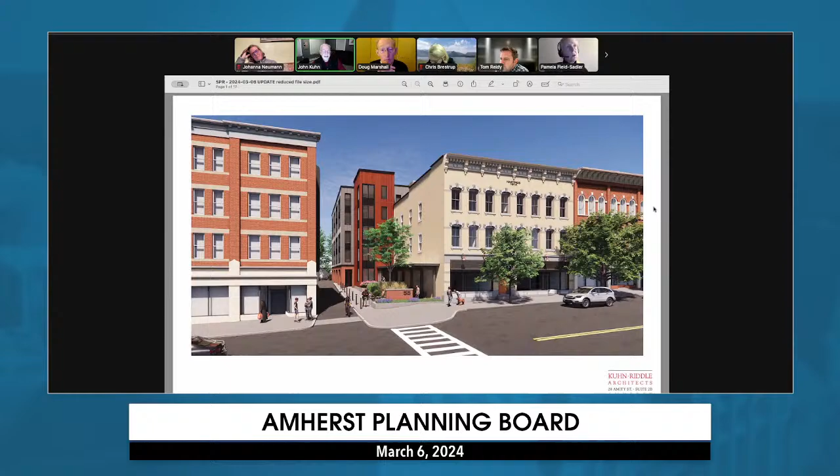Good evening, Planning Board. It's a pleasure to be here, and we appreciate this opportunity to present this project. I thought what we would do is give a brief history of the building and then of the project itself. There is an aerial photograph or rendering that I think is probably helpful for telling the story here. I think you can all locate the Hastings building there.

This section of Amherst along South Pleasant Street is called Merchants Row. Most of it was designed by an architect named William Fenno Pratt, who was very renowned in the area. He designed Northampton City Hall, the Dickinson House, the Hills House, and most of these commercial buildings, as well as many of the beautiful buildings downtown Northampton.

These were all built in the late 19th century, 1879 to 1890 or so. In 1914, Asa J. Hastings opened Hastings store on South Pleasant Street, not at the present location. Hastings was in business for 108 years. In 1937, he moved it into the present location at 45 South Pleasant Street, where it was until 2022.

He passed the business along to his son, Don Hastings, and he and his wife, Phyllis, ran it for many years. Don was, interestingly enough, an alum of Amherst College, lived on North Prospect Street. And I remember when we first moved to town, I used to see him and Phyllis walking to Hastings many mornings.

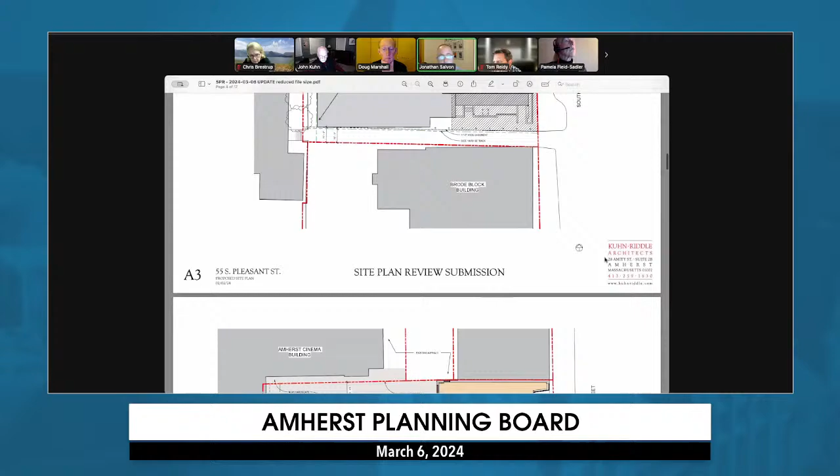Sure. So what we're going to do is kind of walk around or go around the building in the next slide with a little bit more detail. We're going to look at some exterior views, and then we'll get into a little bit of the organization of the building and the inside, which I think will tie back somewhat to what John was talking about with this notion of a block in the back, a block in the front, and a connector piece.

I should make sure that now I'm prattling on, that folks can actually hear me. The last time I was at a meeting, I was sounding like a chicken, apparently.

So this next slide is very similar to what John was just showing you, but with a little bit of color to differentiate some of the different pieces. So again, at that right-hand side front, along South Pleasant Street is the existing Hastings building. Due south of that, is that kind of new entry plaza we've been talking about, which takes you an accessible path from the sidewalk at the street up to the front door, which will be in this connector part of the building, serving as the vertical circulation for both parts of the building.

The front part of the Hastings building, the first floor, is going to continue to be a mercantile space. If folks have seen the papers, you know the Amherst College store is coming into this space. The rear first floor will be amenity space related to the residential uses - we'll have a more detailed plan coming up. So the front portion remains mercantile, and the rear portion is amenity and support space for the residential spaces on all the floors above, in both the existing building and the new building.

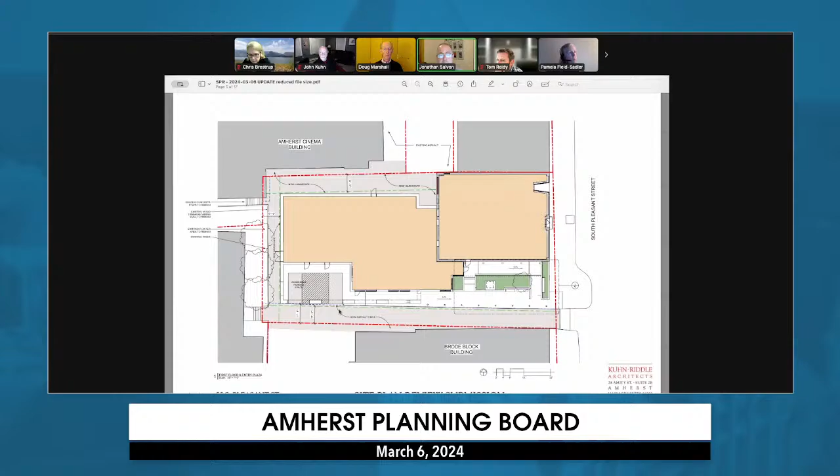Just to continue walking around the site, shown in that light gray, as John was saying, along the south side is the driveway. It's really the same width driveway that exists today - there just isn't a building right up against the edge of it for the first third or half. Continuing north and then back east will be new hardscape paving that replaces the asphalt there today, which will get all chewed up during construction. At the southwest corner of our new building, there will be two pull-in spaces to provide an accessible parking place and a parking place for drop off or someone delivering a package - just one more convenient space. We're not obviously going to be able to meet the parking demands of potential residents on this site given its constraints.

This reproduces, in the upper left here, the same image we had on our cover, but calling out some of what we're doing. Obviously the yellow Hastings building remains in the front. We're taking that paint color and extending it around the south side of the building to highlight the historic piece, especially once that brown building comes down. It probably makes sense to make a cohesive whole out of it.

Behind that, you can see the vertical piece, which is actually a stair tower and lobby space at each floor. The elevator is actually tucked deeper into the connector, but we'll get to that in a moment. You can see we're trying to create some seating opportunities and bicycle locations in this front plaza. We have a covered walkway, and you get a good comparison of the before and after here. It's a relatively narrow space, but we feel like placing the main mass of the new building at the back draws your eye in and does a great job of reducing the scale of what is a 5-story building.

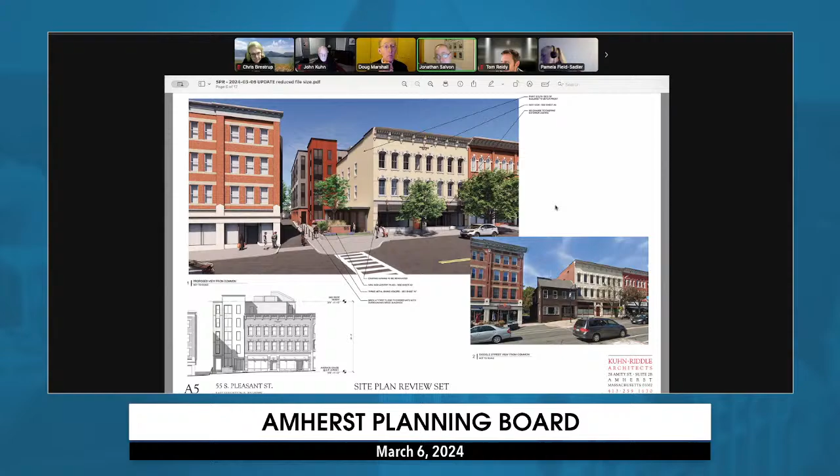This is a view from the south, and we also have tucked in the upper right some examples of the materials we're going to be using. The base all the way around the building will be brick masonry, except at that tower. The upper levels will be a combination of different colors and textures of a metal panel system. On the front part of the site where the Hastings building is, we're adding some additional windows where the brown building is now, to provide better natural light into the apartments that will be created at that level.

I think we can move on, and feel free to interrupt me with questions if folks want - I don't want to lose thought as we're moving around the building. On the upper right is a view from the cinema parking lot.

Bruce? Oh, Bruce. Jonathan, one of the questions we raised at some point, I think, is the rooftop mechanicals. I think you've got screening, but these are excellent images to point out. I particularly was interested, for example, from the Fleet or Bank of America parking lot here in the upper right - it looks like you can't see much on the roof from there. These other rooftop items, are they screened mechanicals?

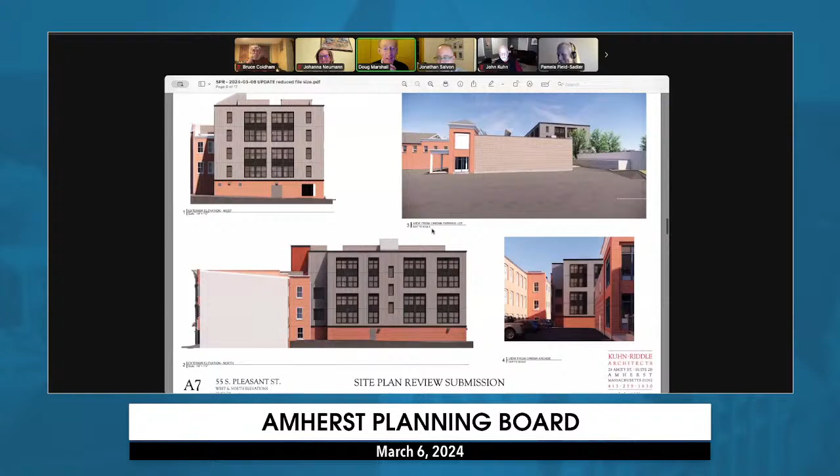All right, so if we scroll back down, oh Bruce, do you have another question, or do you still have your hand up? Sorry, Mr. Chair, I think I just should have let you ask that question. Well, I know Bruce well enough to know that's a legacy. Go ahead, Jonathan.

So I think this is where we were. I think we've touched on much of it, but again you can see in these views that we're bringing that brick band around, and we're trying to break up the facades here by grouping some of the windows together. Instead of just having lots of little punched openings, we're using trim and different textures of the metal siding to create some larger scale form and order on the facades.

Let's move down one more. So we have some detailed views of the entry plaza. I'm going to start at view 1. You can see we have our signage, and tucked behind the signage is the start of the ramp that goes under that canopy towards the front door. You can make out a little bit of the bench and the bike rack as well there, and the 3 different planting beds, which we'll touch on a little bit more.

Moving down on the page to a view from above with the canopy trimmed off, again you can see the pathway of the ramp, that front bed and sign location, the larger, longer planting area that has some evergreen plantings to screen the transformer, and then a last planter by the building as well.

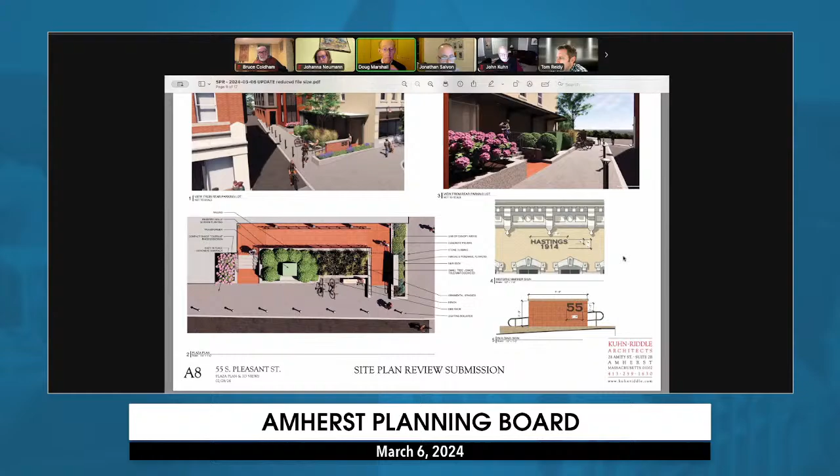Let's move down to the next sheets. So in a little bit more detail, this is kind of a combination of things. This does have some detail on the species of the plants, which unfortunately, at least on my screen, I can't read, but I can describe them if necessary.

And what do you mean by tenant amenity space? So it's sort of thought of as a lounge space. There'd probably be some soft seating in there. A lot of the newer multifamily residential buildings have them. Sometimes they do gyms. I don't think that would be the case here, but the full use of that space has not been fully programmed out yet.

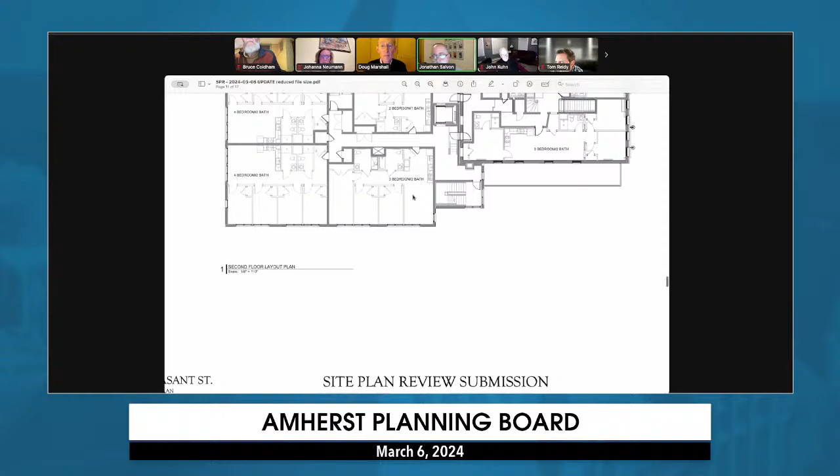I see that there are 2 doors between the 2 elevator lobbies and the old building. Yes, so there's a firewall at that location, and those doors will be on hold-opens. But the notion is that either building would have to be able to fall away if there were ever a catastrophic fire, which with a sprinkler system we would hope would never occur. That's what the 2 sets of doors are for. The other option would be to have one of those fire shutters, but at the moment we're doing pairs of doors.

All right, Janet, I see your hand. Doug, so far you're asking all my questions.

One of my first questions when I was looking through the packet the first time is, are these two buildings or is this one big building? Is this like an addition to the Hastings building? So I don't really understand. If I was a tenant on any of the floors in the Hastings building, could I walk and go visit my friends on the same floor? Yes, the doors are freely opening. The doors would be on electronic hold-opens, so they would be in the open position unless the alarms go off and the doors shut.

Okay, thank you. There are other ways to do this — there are these rolling shutters that can come down from above. But this is probably the simplest solution.

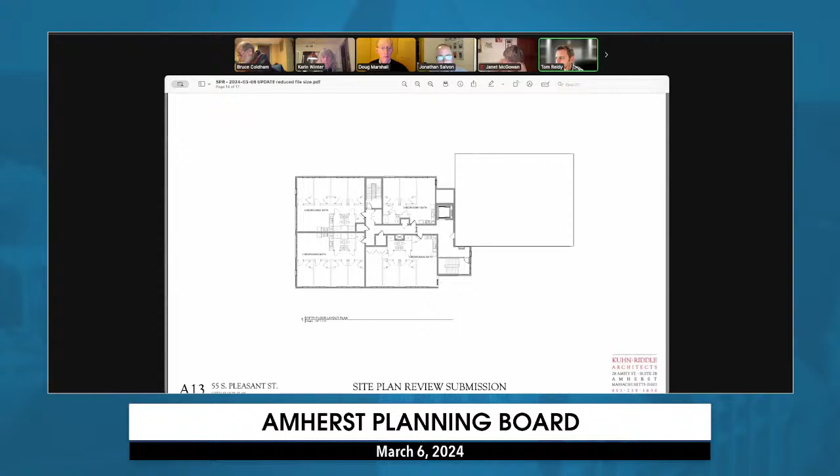All right, Jonathan, I'm just trying to remember if there was anything else I wanted to point to. Yes, we're referring to the section through the screen. Yeah, and we would make that, I mean, the backup structural part of it would probably be wood, but we would clad that in the same sort of metal panel we're putting on the skin of the building. At some point we'll have to review that with a structural engineer. They may want us to use a perforated panel, but it would still be the same color and textures as the other pieces. There would be a similar piece, which I don't think we've highlighted yet, on the existing building.

Now, obviously there's going to be some mechanical equipment on the existing building, but there we also have the benefit of the traditional high parapets that a typical 19th century building would have. So we're kind of belt and suspenders there a little bit, but better safe than sorry.

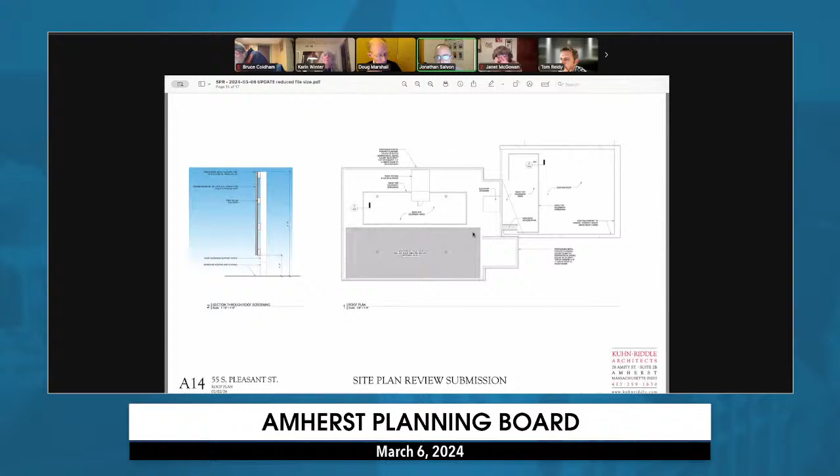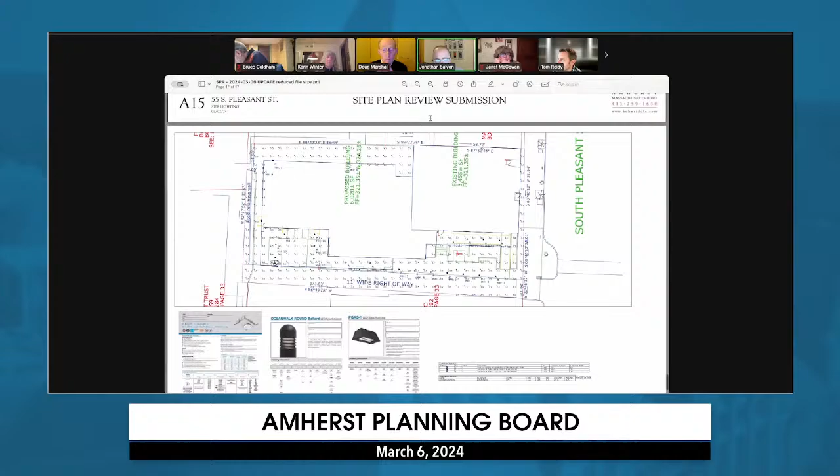Okay, and I think so. We had worked through Barry and some of his suppliers. We've done a kind of tentative lighting layout with a tentative photometric, which is always a challenge on these calls to read.

Could you make that bigger? Or are we gonna - yeah, is there anywhere... so, I'll start, yeah, maybe I'll start at the front and we can, as Jonathan says, walk around the building a little bit.

Those zeros right there are a little disingenuous because they did not do the photometrics on the existing fixtures, and obviously there are also a couple street lights right there. But, from the person who ran the computer software, it's zero because they didn't input anything. There are downcast gooseneck lights along the front as they exist today, and that's what's proposed when Amherst College goes in front of the DRB.

When we're close to the street, these are the light levels that the lighting we're installing would cast, and that doesn't necessarily count the additional light that a street light would have. We have a row of bollards, I think they call them the MH fixture here, to line that entry path. We have some recessed cans underneath our canopy, and I believe there's some step lights.

I'm pretty sure we had another light on the back side of that sign to illuminate the side of the ramp there as well. Yeah, I'm just not seeing the fixture number for some reason.

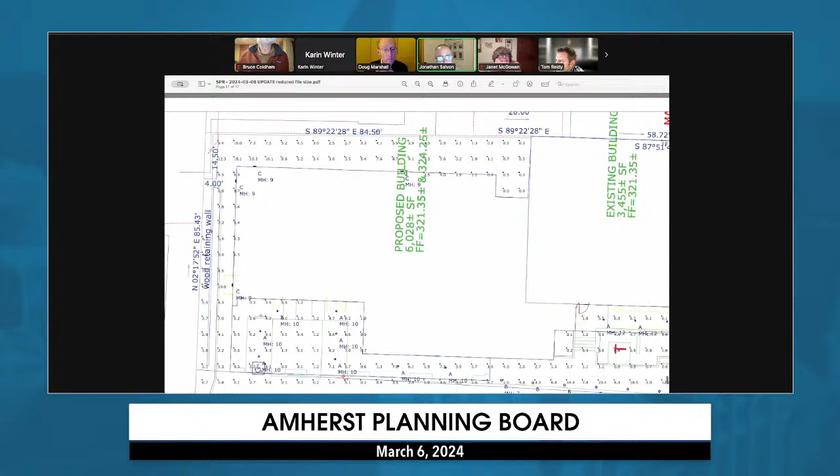And then as we move a little further west and then north, there's a wall or building mounted light fixture above each of the doors. So the trash room service door, a couple here at the corners where there aren't doors, but it would otherwise be a very dark little corner between the various buildings, and then one at the egress point there.

Jonathan, is the trash exiting the building on the west side or on the south side? On the west side. If we can move back to that plan, you can see it in a more detailed view, but it would be in that sidewalk space.

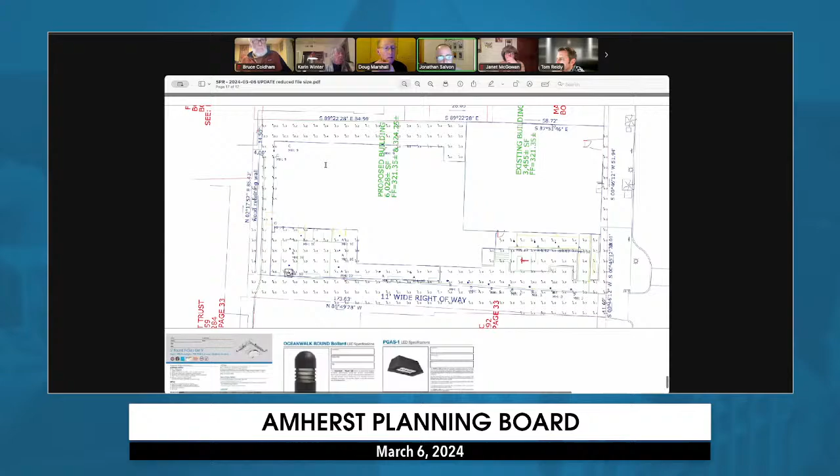And your trash hauler is okay with that? That seems kind of convoluted. It's a far little... convoluted, but there was some concern about whether we didn't want to ding up vehicles that might be parked in the parking space, or assume that they're not going to be there at the time the trash needs to go out. So it was felt that the best decision was to simply take it out of the building directly and bring it around.

It's going to be in rolling bins as it is. You're not going to get the big... there's not going to be room for a dumpster, so they're going to have to be in rolling bins, unfortunately. And the toters will stay inside the trash room until the truck arrives, or will they come out beforehand? I don't know, Tom, if you want to talk a little bit to the management plan, but that's as I understand it.

Yeah, and I'll ask Barry. I know he does this on University Drive South, that's the 3-story building across from Kindergarten, corner of University Drive South and Route 9. There's a trash room there, and they get rolled out for USA Waste to pick up. Oh, it's the night before or the morning of. Yes, yes.

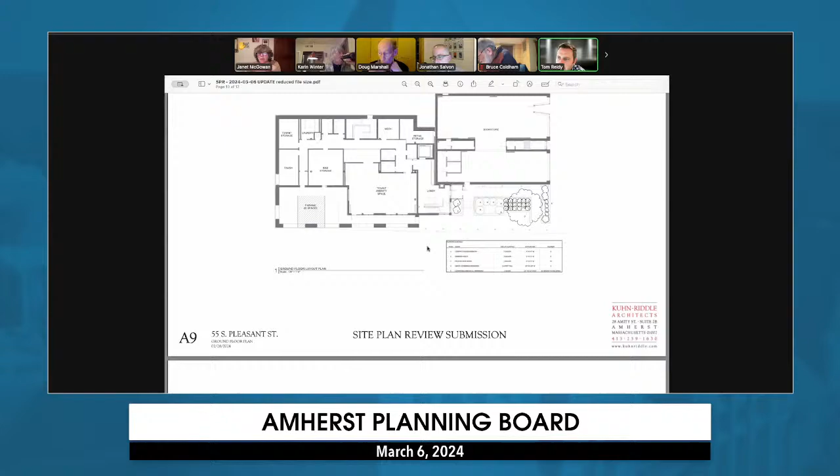But where would the trucks sit is my question. Would they... I suspect they'd have to be in the drive, yeah, probably in here. Isn't that a road? No, it is a right of way, but it is part of the property of this project.

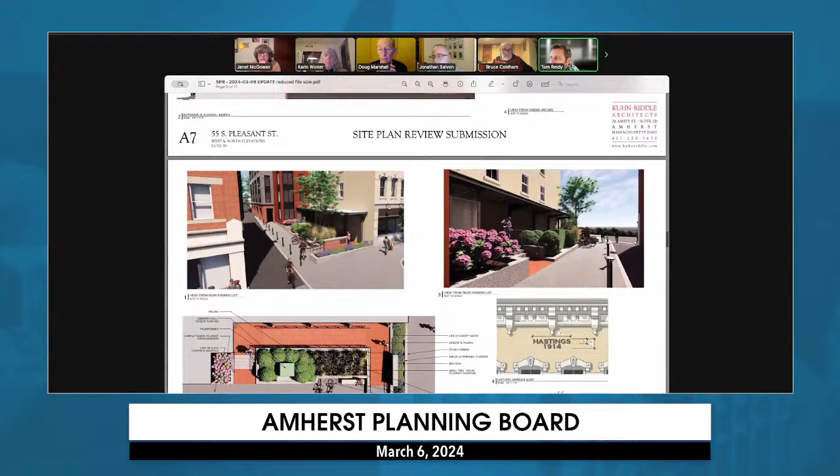But it's a right of way for everybody behind it, right? And the buildings behind it. Yeah, but I think they have alternative access - if I go to the aerial, yep, there we go.

So there's another way to get around from this, the Brody building, so-called. They could come out this way so they wouldn't be pinned in if there was a vehicle parked in that access. Tom, I assume that the Brody building has easement rights to the drive on your property. They do, that's correct.

So it would be something you'd need to coordinate, or at least as a courtesy let them know, that on September 1st we're going to be blocking with our tenant unloading, and you'll need to make your one-way on the south side of the Brody building two-way or something. And in your experience, is the fire department okay with that kind of event? I think we'd be coordinating with them as well, but I think they'd be okay with it. Barry's had conversations with Chris Bascom at the fire department just about this site generally, and they were okay with it.

Okay, well we did have comments from the fire department in our packet, so perhaps we could put that in the management plan. In terms of the other way in and out of the Brody building, I had a memory that it was one way. Is that a one-way or two-way egress? My experience is that it's been one way going in on the north side and coming around and out on the south side. So that would need to be temporarily marked otherwise if they were blocking the space.

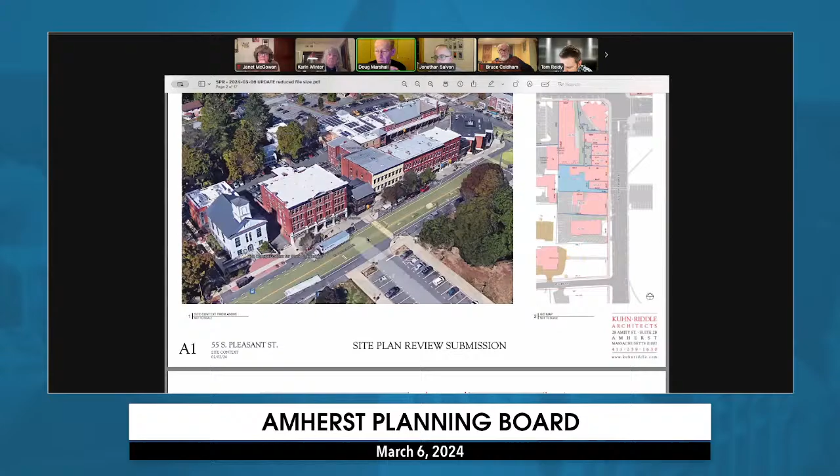All right, Jonathan, we've continued to interrupt you, but go ahead. That's all right, I think we were at the end of what I'm going to call the architectural package. I'm glad to entertain questions, but I think we do have a short site package too, a more formal site package. Before you leave and we go to the site package, I'm going to ask you a question about something the site package showed.

The site package showed a prefabricated concrete stair, or precast concrete step assembly, and it had a railing shown that was not ADA compliant or MAAB compliant. I wasn't sure where that particular piece would show up.

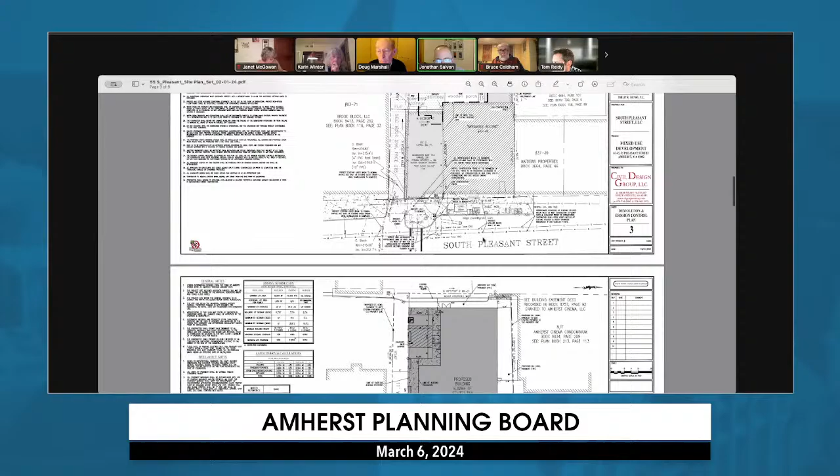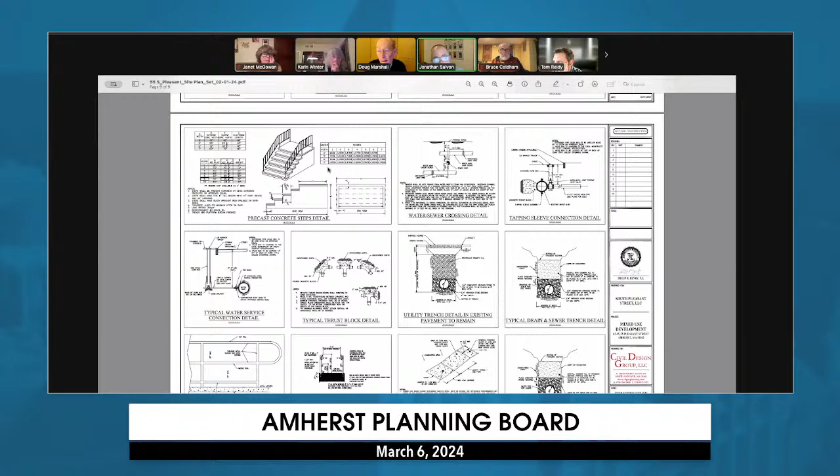I know where that is, on sheet 9. That is actually right near our front door. The ramp comes up one side, and well, I don't know — that's not that though. I think, not to speak for the site designer, that may be a kind of standard detail that just landed on this sheet, because it doesn't correspond to our stairs. Okay, all right. I will say we need to do some coordination with the site designer on which one of us actually has the final details on the ramp and stair railings.

But I expect they'll probably be in the architectural package. I suppose one question I could ask Mr. Roberts is... actually never mind. I'll just say, what level of design quality are you striving for in this forecourt and the pedestrian experience approaching the building? Is it pretty low end, something like that prefabricated precast stair, or is it more crafted?

I think we're looking for something that's more crafted. I will certainly defer to Barry and the finances that come along with the project, but the intent is not to have a precast stair. What we presented to the DRB is that the retaining walls around the planters would be stone of some sort. I'm showing sort of a granite, but the final construction details are not done on that portion of it.

All right, well, I think you showed us some of the materials for the building. Do you have materials for this forecourt? Well, I think we could probably present some more. Our intent is to do it out of stone, but I don't know that we have a final material selected yet for the railing and the site walls, and what kind of materials you're using for that.

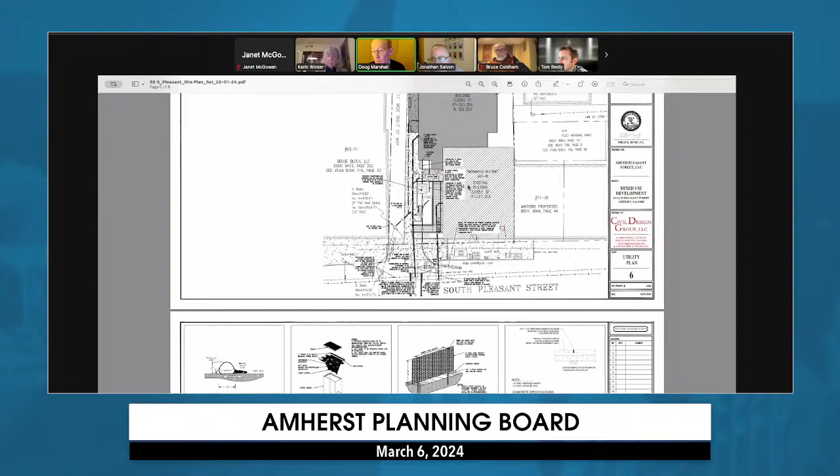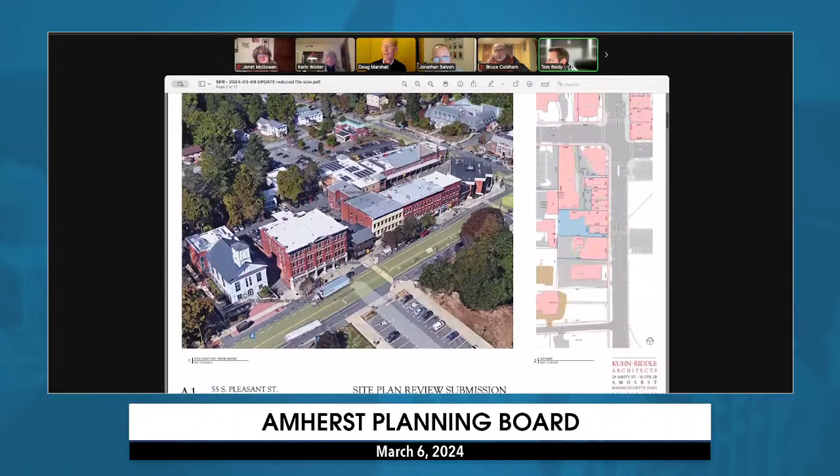Is the ramp an asphalt ramp, or is it concrete, or is it paved with stone? Let's go back to the architectural package, Tom, if we could, and I'll let it come up. There we go — if we scroll down to, I think it's A8, we have that blow-up view. I must have moved too fast through that.

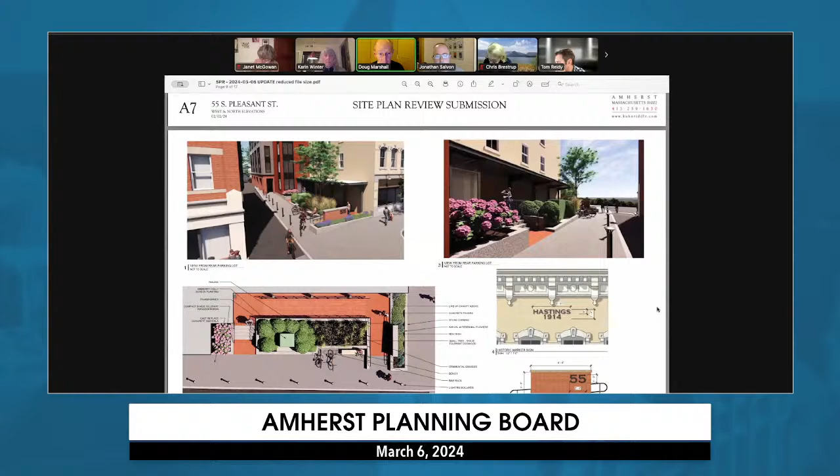All right, so the first one: the applicant should consider a method to make the elevator shaft feel less independent, whether through color scheme or blending of materials. If we go back to the earlier 3D views that show the whole building, that's one, honestly, as the design team, we don't necessarily agree with. We like the architectural separation that the tower has as a separate color and a slightly taller form. I don't know that there was necessarily unanimity on the part of the DRB on that topic.

Second item: consider incorporating more outdoor lighting into the arcade area. I think we've responded to that. I don't know that we had the photometric or lighting plan at the time they reviewed it. In fact, I'm sure we didn't.

I guess, Karin, I know you're on the DRB and I see your hand - do you want to say something before I go through the rest of these? Yeah, I was at that meeting and you're right, Jonathan, there was not unanimity about that. I personally am on that board and I agree with you. I like the separation too.

But I wanted to say, this arcade coming in - I don't know, it looks different to me than on the other pictures. Have you considered having that brick thing in the front just be a sign? Is there any reason to block it off? It seems like you could make that whole thing accessible from the street and open it up as a place for people to meet.

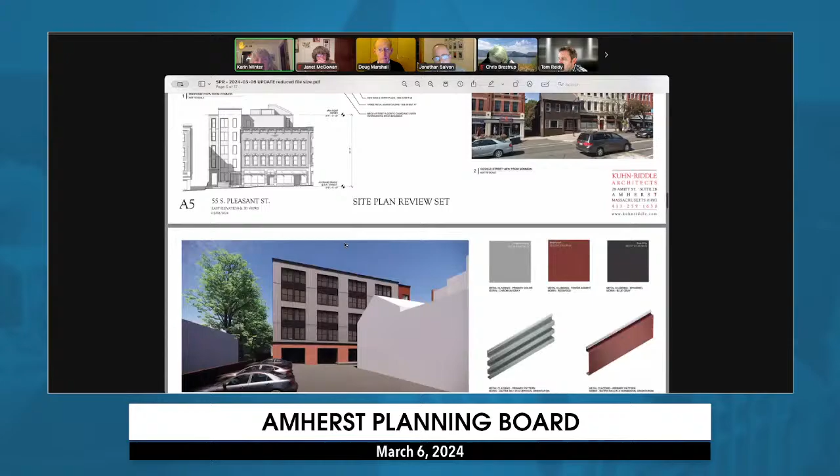Unfortunately, we may still have a stepped connector there - we're still going back and forth a little with the site designer on that. But unfortunately, if we brought the ramp straight down into the sidewalk at the street, the cross slopes don't meet accessibility guidelines. So we need the longer run to meet up at a level spot from a turning corner.

I see - the sidewalk at the end of that ramp, if it came out straight, it's a little steep in the north-south direction, but it also pitches in the east-west direction, so it's a rather warped plane. Okay, Janet.

So I agree with Karin on that wall with the number on it. When I first saw this plan, I thought, oh, this is great - here's this place that kind of invites you in. But that brick wall just says don't come here, and behind it is this kind of wall of boring grasses. To me it's a missed opportunity to tie in the street, people passing by, and the people who live there. I wonder if it could be more of a plaza.

I don't suggest getting rid of the ramp, because obviously it's important, but I would get rid of the wall and the tedious, almost corporate plantings of grasses and the same evergreens, and make it more of a garden, maybe with more seating for people in the building, or someone coming up with a cup of coffee to talk to someone. That wall just pushes the interaction away from the street, if that makes sense. So I wondered if you could make that plaza more of a nice community meeting spot, or a place where the tenants can sit.

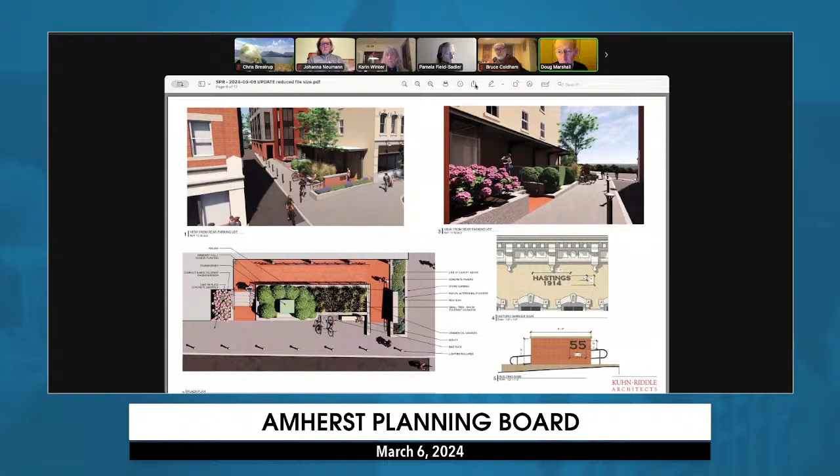Okay, none from the board at the moment. Board members, do you want to continue this conversation this evening? Jonathan, is there more material you want us to go through? Did you want to go through the civil drawings in more detail? I know there were some questions in the development report about the stormwater management, and we could spend time tonight going through that and the rest of the design review board comments. But it seems like we've already gotten to a point where you're saying we need to think about that some more, and maybe you'll be coming back anyway.

If I could, Mr. Chair, I think for what it's worth, with our engineer here tonight, why don't we get into the site plan just to talk about drainage and see if there are any real concerns, if any modifications need to be made, because what I've heard so far is go back and particularly look at that front entrance, seating, et cetera, which is more of an architectural piece, obviously a site plan component, so that ideally we come back on March 20th. And with all due respect to Phil Henry, maybe we can give him the night off. So okay, all right, in that case.

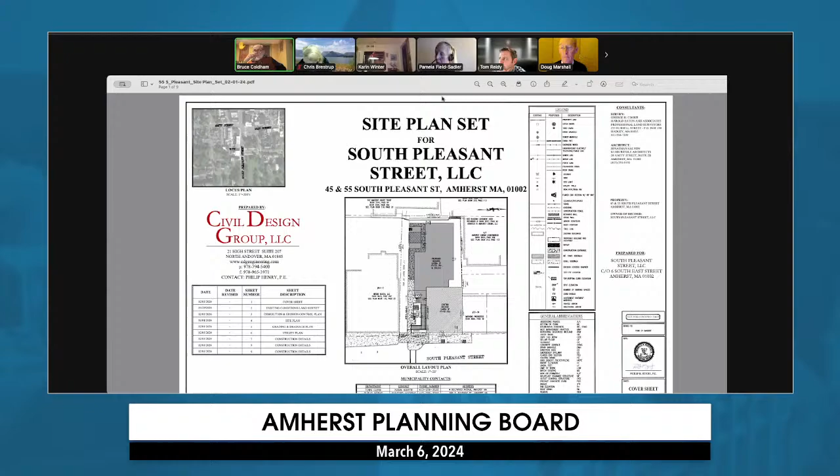Bruce, I see your hand. I'm going to suggest that after Bruce makes a comment we take a break for 5 minutes, and then we'll come back and go through the civil drawings. Bruce, I was just going to observe that we did have a site visit on this, and we haven't mentioned that. We typically have a short report from those who attended. Right, yeah, I lost track of that. So why don't we start on that when we come back from our break? I thought you might want to do that.

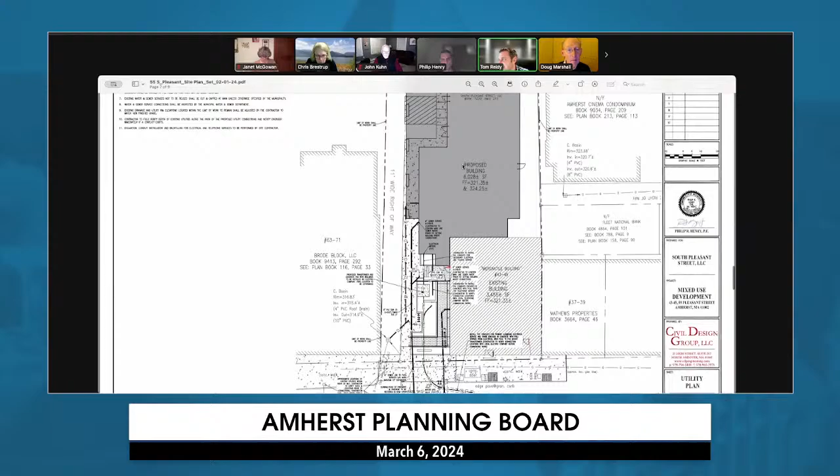All right, Tom, is there any more drawings you want to show us? I don't know that there needs to be, I mean we really covered a lot through the architectural piece. And to a certain extent, the site is what the site is. So I don't know that we need to go into anything more as far as the site plan, but I'll defer to Ms. Brestrup and the board.

Chris, I see your hand, and I had one other question. I wonder if Mr. Henry or Mr. Reidy can talk about the roof drainage. I think some of the roof drainage goes into the catch basin in the driveway, and some of the roof drainage goes in a different direction. So just give the board a sense of what happens there.

Yeah, I could talk about that. The new portion of the building and the overhang along the colonnade or arcade along the front will be captured and piped into that existing catch basin in the alleyway. The Hastings building has a roof drain leader, in the back right corner or northwesterly corner, that discharges in a northerly direction. So essentially the mercantile building's watershed and capture area is remaining unchanged from existing to proposed condition. So the existing building to remain is heading north and the new building is heading south. Thank you. All right.

And then I was just going to ask, for the vehicles that are supposed to be potentially using the 2 parking spaces, are the turning radiuses adequate? Is there adequate room for those vehicles to actually get into those spaces?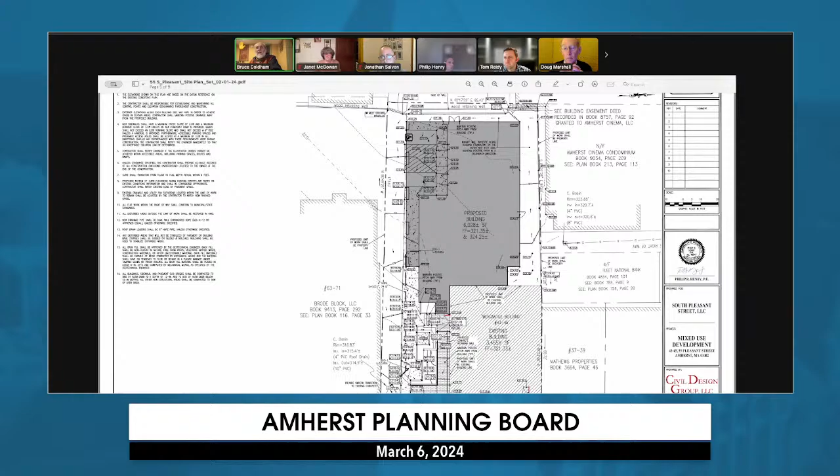One of the things I've been wondering is how do buildings like this support people who live in them who own EVs? I think there's probably going to be lots of questions about that, and that they charge them in remote places and so forth. I think giving some thought to how eventually you could put more EV charging in here, maybe both of those spaces would be... somehow or other, I'm sure there's going to be changes in the way this parking gets used as time goes by, related to the need for people to charge their vehicles. I think we probably just have to accept that evolution will happen out of our control, but if Barry or Jonathan have any ideas about how we could facilitate that transition somewhat, it would be a nice thing to be thinking about.

I'm not asking for a response to this. I'm just making a public comment, really.

So in this case, I would expect that we have two places. There will be one charging unit, and often those come with two heads. Although, depending on how this one is actually used, which is admittedly a little unclear to all of us at this point as we go through this transition, if it's placed centrally, the cord can reach either vehicle, even if it isn't a dual-headed one.

Okay. Janet, are you coming back?

Yeah, is it possible that you could meet the new code by putting the EV charger in front of the Hastings building, so it'd be actually useful to people?

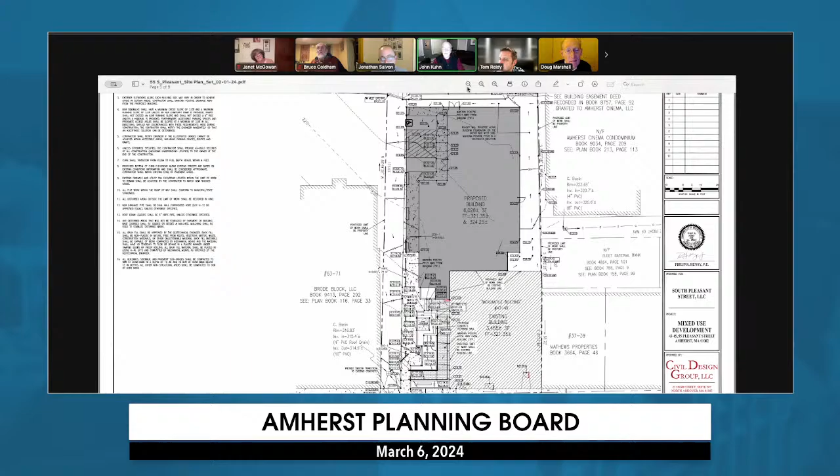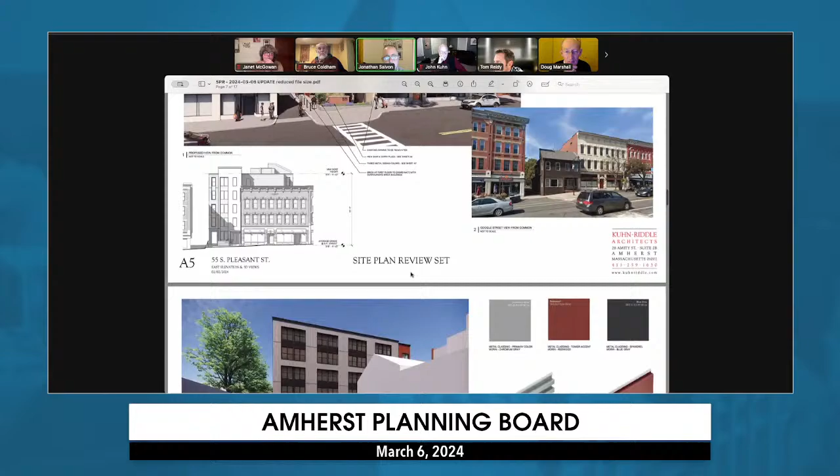And the walkway that's running inside, sort of under the building, east of the parking spaces, could you bring the first floor plan back, Tom? I'm wondering, is there a window from there? Yes, there is. There's under that arcade, as Tom gets that up, sort of a storefront that will look out from the amenity spaces. So you're not going to be just walking between a blank wall and some piers. No. Scroll, Jonathan, what's the other best direction? Yeah, there you go. This in here. All right, so those are windows.

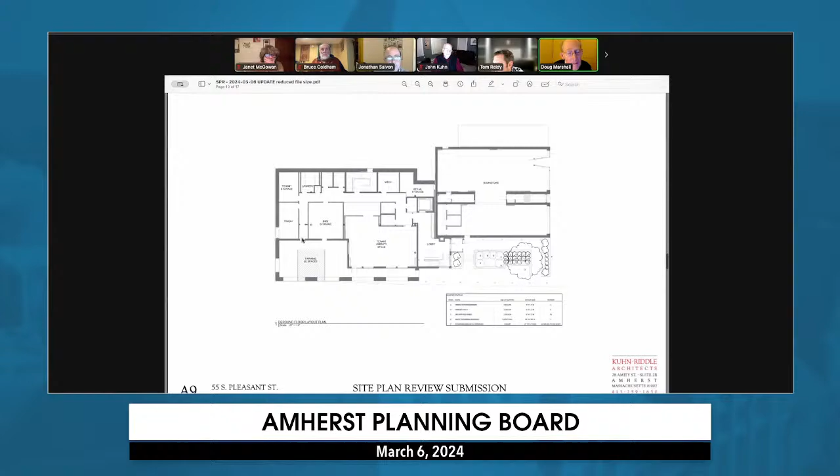And you're saying that the westernmost of those doors is the accessible entrance to the first floor? Scroll down, Jonathan, and bring up that more detailed plan. There we go. So yes, the westernmost door is the accessible entrance. If you zoom in a little, Tom, the clarity gets better from my screen. Okay, so if you're in the accessible parking space, you'll have a fob or some way to get in that door. That's correct. If you live there, you can come in that way.

It's all a little unusual in the sense that two parking spaces is atypical for this many apartments, in a sense.

Bruce, good question to ask while this plan's up. The bike storage, is there any intention to provide charging for electric e-bikes and so forth in there? I ask that because I understand that at the moment there's some concern about the instability of these batteries. So is it possible to put bike charging in there without improving the fire rating of the walls enclosing it, for example? I have to say we have not gotten to that level of detail. In my head, at least, we were designing it around your typical human-powered bike, not an electric-powered bike. But the folks who live here without cars, I'm going to guess, are going to be perhaps a stronger market for e-bikes than average, and this is also nice and secure, which is another thing e-bikes would want. If you've got this valuable bike, you would like a place like this to store it. So really, the dominoes are leaning towards e-bikes, I thought. And I'm just asking whether that might be a feature that is provided, and hopefully it can be done so, or at least from a regulatory standpoint.

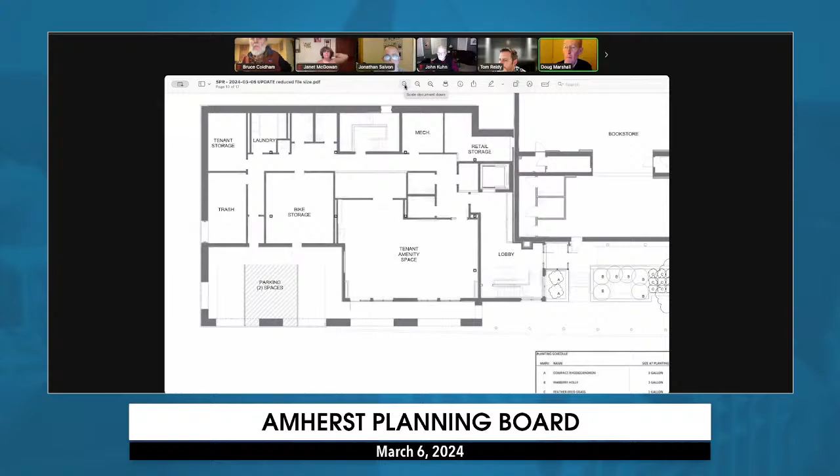Good point, Bruce. All right, I'm going to go back to the member of the public with the phone number only and see if we can bring them in and give them an opportunity to speak again.

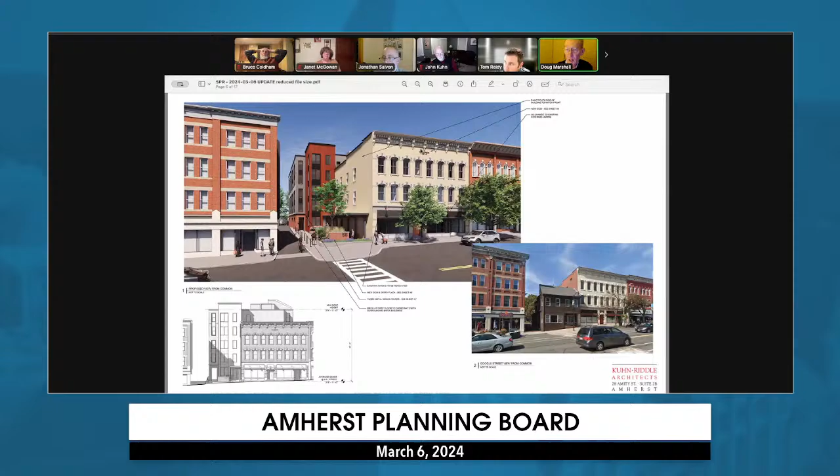All right, welcome to the planning board. Please give us your name and your address. My name is Vincent O'Connor. I live at 175 Summer Street in Amherst. And I have a number of declarative statements, and I'll be happy to clarify them after I make them.

And I think the first thing I would say is that the somewhat Rube Goldberg nature of the parking and vehicular access issues could give the planning board pause about rendering its approval.

With respect to affordable units, rather than accept cash, my view is since the developer, the applicant, has other units within town, some under construction, others already constructed, the board should require that the applicant make available on a one-for-one basis. At the same time, if the building is granted an occupancy permit, that the affordable units in other buildings owned by the person be made available as affordable units, and not have it be done by cash. If this were a different situation, the cash issue might be the only way to do it. But this is not, and the owner has plenty of other units in town that he could set aside as affordable and make available on the very same day when the occupancy permit is granted.

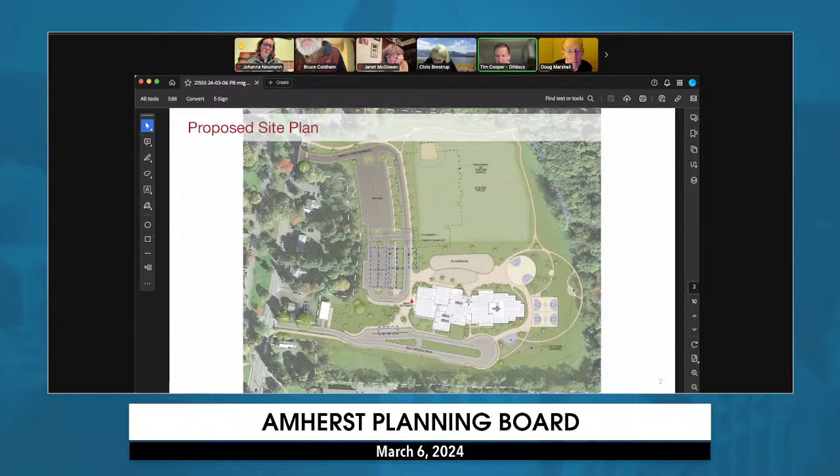So on the screen now you can see the roof plan superimposed on the site plan. The typical equipment we're talking about is located within the center of the roof. There are 4 major pieces of equipment - those are the dark gray rectangles visible on the roof. They're air handlers over the gym, on the 3rd floor high roof, and here to the eastern edge of the building, and those pieces of equipment are more than 25 feet away from the roof edge.

The language was shared with us by Chris Brestrup, and it meets the current condition. What this diagram shows is that we do include in the current design screening that will block the equipment visually, looking from the west, which is the way bus traffic and people entering from the public way, many users, will approach the building, and also approaching from the northwest through the parking lot, the way parents dropping off at school.

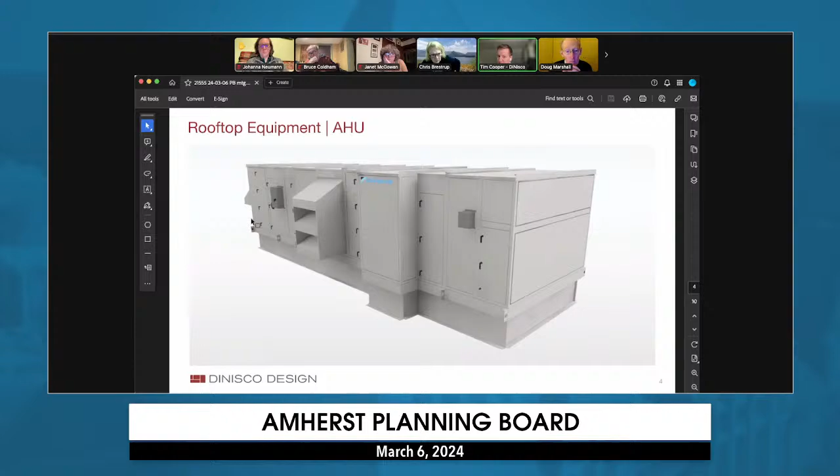We included some visuals of what these pieces of equipment actually are. They are self-contained units with all of the mechanical equipment inside, typically matte, close to sky-colored boxes. We don't know the exact color because this is a public project, so we have to give three-or-equals to meet public bidding laws, but this is generally what you're looking at. Sizes vary by manufacturer, but this particular one, which is the basis of design for three pieces of equipment, is 7 foot 6 tall, mounted on a curb, so the total height from the roof will be around 10 feet.

The other type is from another manufacturer, a slightly different type of machinery but a similar configuration, a matte painted box with some ductwork coming out of it. The exact configuration of that ductwork we don't know, because we won't know until we see which equipment submittal we are using.

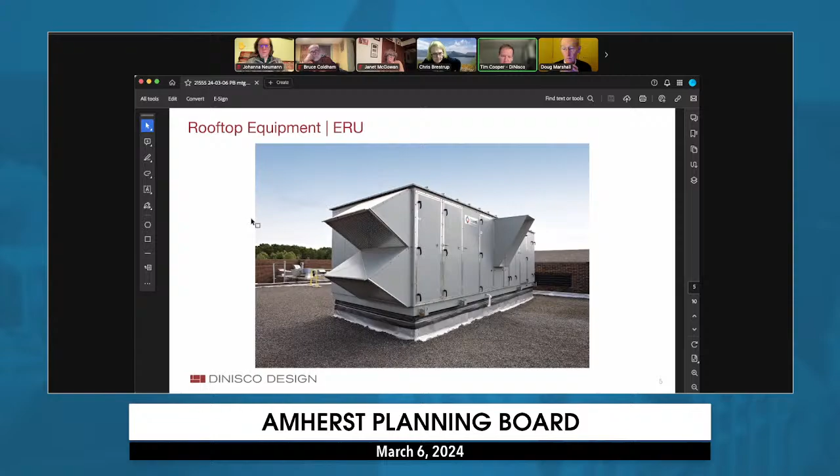We wanted to illustrate what would be required if we were to totally visually screen all of the equipment from anywhere on the site. We're not including a screen to the east because that's essentially wooded land on the east of the Fort River site until you get a considerable distance from the site. We don't think anyone will be able to see the equipment from the east side of the building.

We happen to have a pretty good number for what this would be if we were to place more screen in kind, because at DD we actually eliminated some of this screen wall. So all in total, you're looking at about 340 linear feet of screen wall, and with markups, it's about $300,000 for the project to add this. We just wanted to have that as context for this discussion.

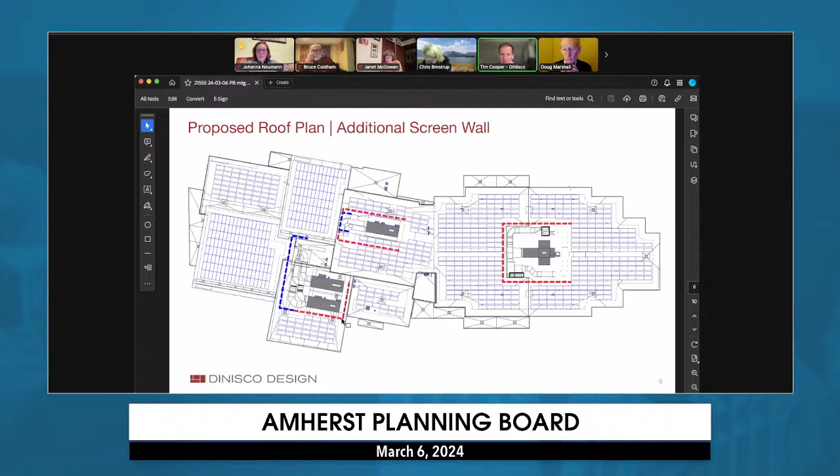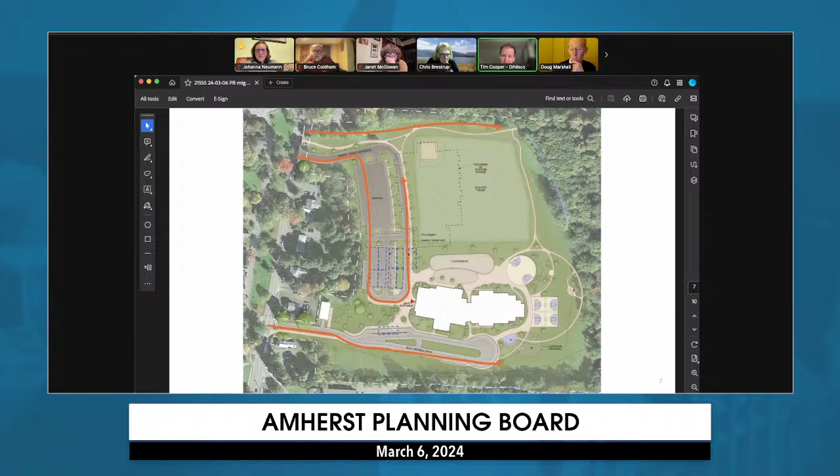And if you're interested, we have a little bit more modeling from the site that will show you exactly what you'll be able to see in the 3D models that I can share. The equipment is rendered as bright red so it's perfectly clear what it is, but in real life it would not be—this is just an illustrative model. Give me one second, I'll pull that up.

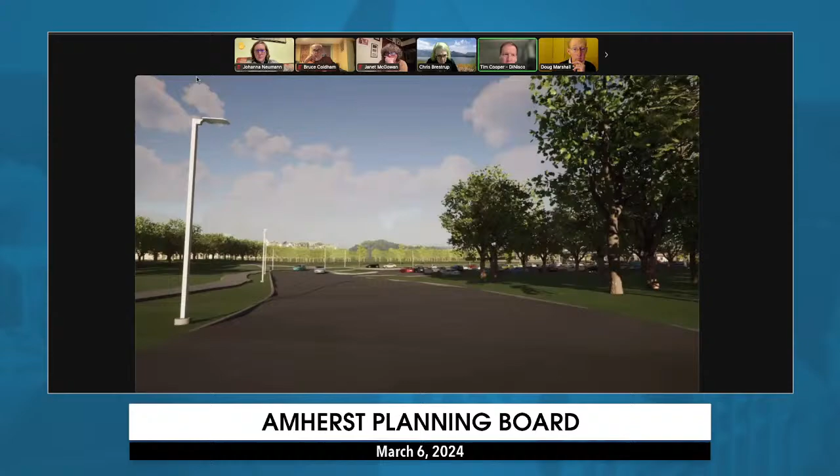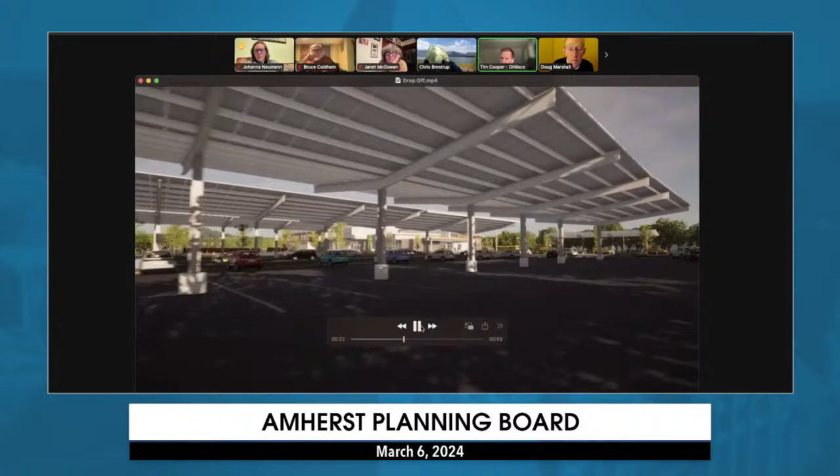So this is the path that a parent dropping off at the school would take. You started back at the public way, but now you're coming into the parking lot, driving south, approaching the building. You can see the rooftop equipment is there—we've painted it red so there's no mistake that you will be able to see it. But as the images just shared show, it is a box on the roof, and if we were to build a mechanical screen all the way around it, it would be significantly more visible.

At this point, presumably you're actually looking forward. If you were driving, hopefully you would be. There are kids, yes. But for the sake of this conversation, we are a passenger in the car, and we are looking at the building. Okay.

And so here we are, not fully back, but almost to the northern end of the athletic fields. That is the 600-foot number that you mentioned before, which was included in the previous materials emailed after this discussion came up. And one more, since it addresses a specific question.

At the very northern edge of the property, at the public way, there would probably be some trees at the property line obscuring your view from this point. You are considerably north of the entrance drive. But if we move along the northern edge, north of the walking path and athletic fields, looking at the building, you're some 650-700 feet away. So you're looking at a very oblique angle, but you can see the equipment, which we've made red here to make it pop against the building. There are buildings to the north on a couple of parcels, and we have no intention of saying you won't see the equipment, but there it is.